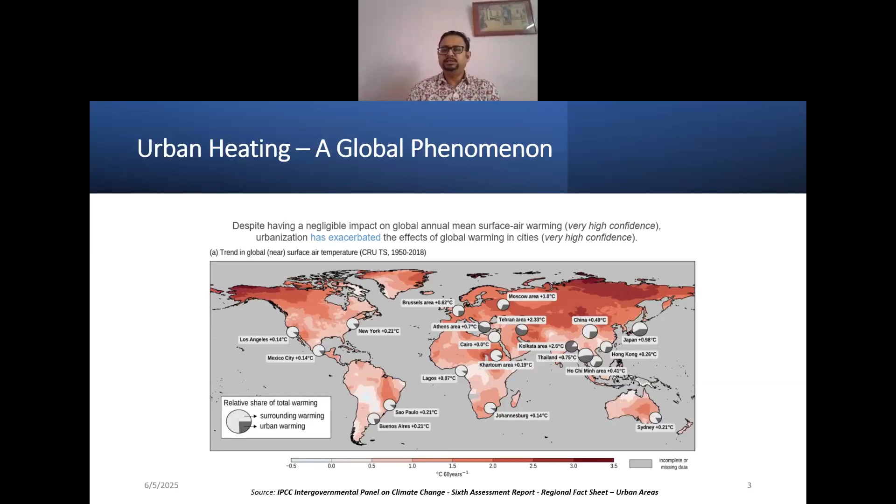So in order to do that, the moment the problem was identified, or the problem city or the case study was identified to be Kolkata, the next level was to look into the factors which actually contribute to the heating. It has been found from different studies that the root cause for warming of any city is its geometry, and that's on a macro scale.

The more we go into micro level, into the building level scale, we find that the heat retaining properties or the thermal performance of the buildings and the road are one of the major contributors to the problem of urban heating. The materials that make up these cities are very good at absorbing and retaining heat during daytime and then re-emitting them during nighttime, contributing to overall day-by-day warming of the city itself.

And then comes the urban heat island effect, which is further amplified if the city lacks vegetation and water bodies. We all know that Indian cities, in most cases, are losing on these two attributes. Urban water bodies - even in our school or college days, 2-3 decades back, in the city of Kolkata or in any urban city in the eastern region, we used to find so many ponds, neighborhood level or regional level ponds, which are no longer existing.

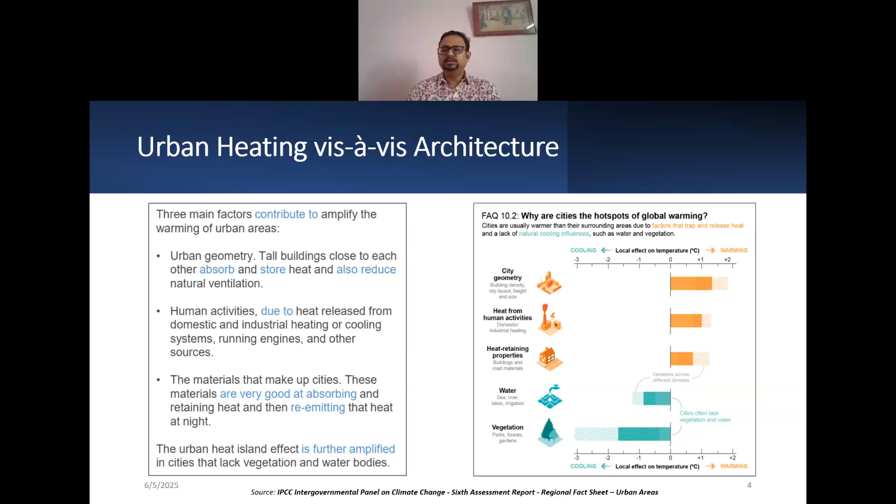Incessant cutting of trees, another problem. We have to develop, so we have to sacrifice something. Trees - easiest prey.

So the three levels of architecture and urban heating, the three facets: urban geometry contributing to it, with the form of building, proximity of built masses - these are the two things which actually come up from the urban texture or urban geometry of any city that we find. The second level...

human activities, where most of the perception of comfort comes up. In the same environment, within the same building, different people behave or react differently to the problem of heating, depending on their perception of comfort, which is again affected by many physiological attributes as well as activity patterns of the particular person. And then the artificial intervention comes up to solve that particular problem - air conditioners, air coolers, different types of mechanical control systems, they come up to compensate the heating.

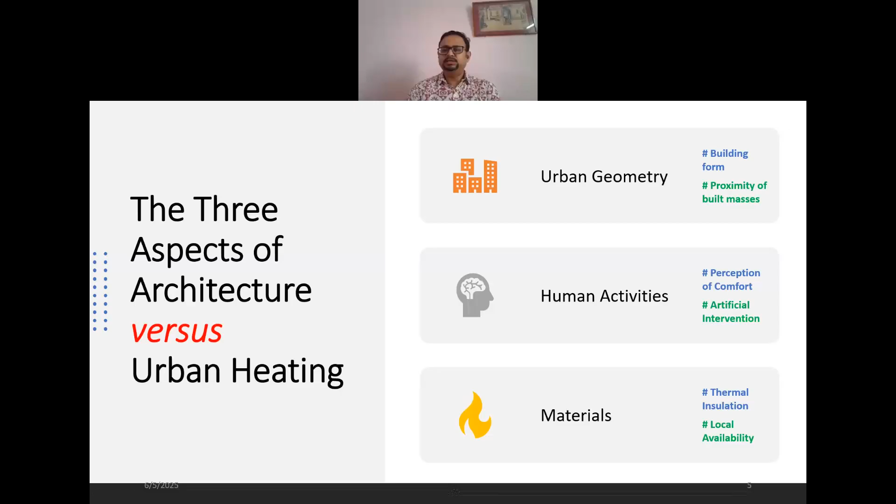And then lastly, the material level, which is the minuscule level in designing and construction of any building - the thermal insulation of that, local availability of that, all those. These are basically some of the thrust concerns that we have. And if we now get into...

the mitigation of UHI - what is required in order to mitigate urban heat island in any city - we can divide it into two different scales. One is urban scale, which is beyond the purview of this particular research and presentation, and the one which comes within the scope of this presentation is building level, which has approaches like shading and solar control, green roof, green wall, and courtyard centric planning. So these are the main thrust areas that we have.

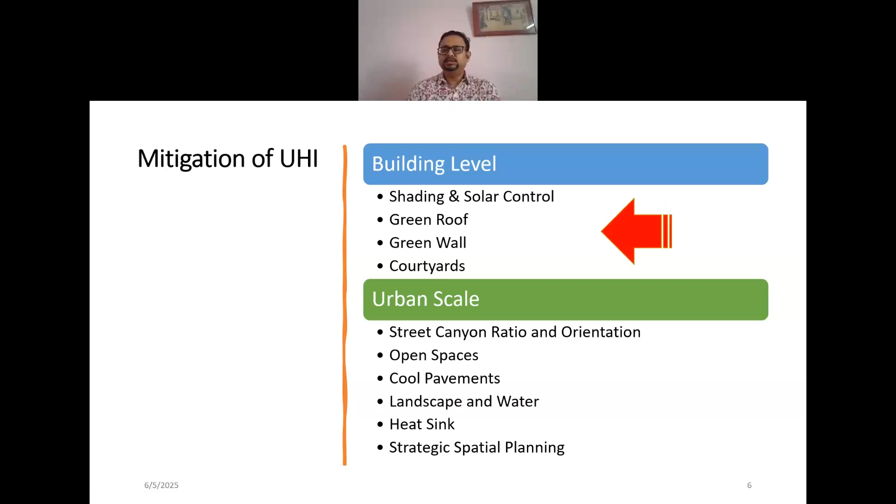So with this small background, the research that has been taken up and concluded has two major research objectives. The first objective is to find out whether old indigenous residential buildings of Kolkata actually show better thermal performance than the new residential buildings of the city. Is it the new buildings? Is it the new residences which is actually contributing to this urban heating?

As the IPCC map has shown, from 1950 to 2018, an increase of 2.6 degree centigrade average temperature has happened for this particular city. Now, what was responsible for that? Is it so that the residences, which constitute more than 50% of the total land use or the total built up mass of the city, are not so competent?

I'm putting this entire phrase in quotes - whether these new residences are not so competent in order to cope up with thermal comfort or thermal performance, which is required for the basic thermal need, or I'd say basic thermal condition, of a human being or of an occupant.

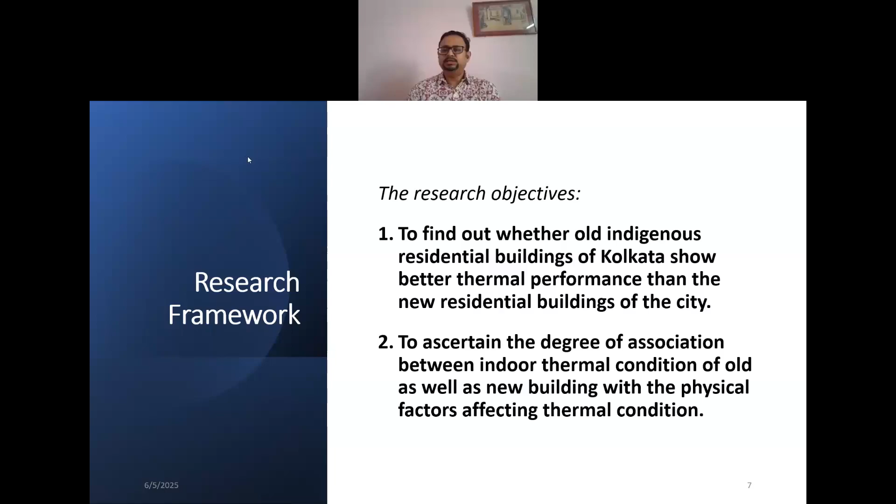And so that we can identify them and, if possible, reincorporate them in these new buildings, which will actually help the new design cope up.

Now, for conducting this research, there were three major steps. I'm coming to this slide a little early so that we can understand the sequence of the entire presentation more easily. There were three sets of data collected in the whole process of the research.

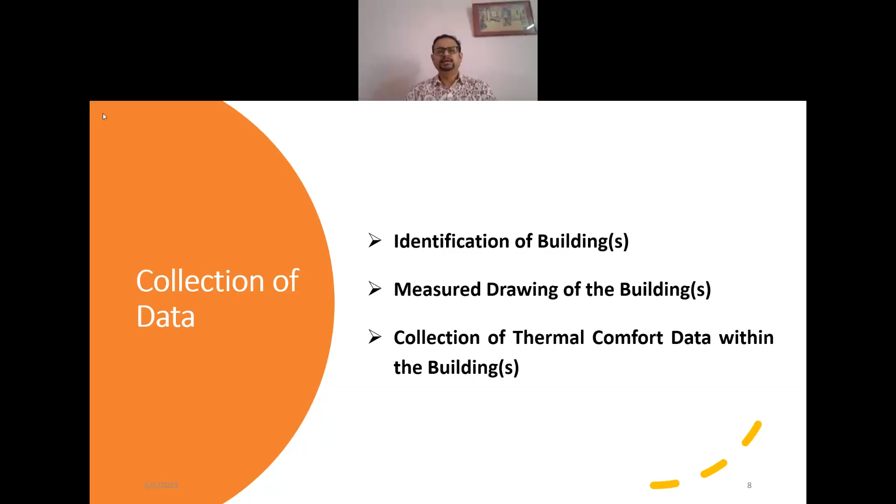First of all, identifying those buildings. Second, preparing measured drawings of the buildings so that the building geometry becomes very clear to the researchers. And the third is collection of thermal comfort data within the building. It was a very simple methodology adopted.

Coming to the next thing, what were the different component processes involved in the whole research? The very first component process involved was, first of all, identification of the responsible factors, their parameters and their indicators. Second, getting the thermal comfort perception or thermal performance, which we will find later on. And the third is the comparison of the old versus the new building.

Now, in this, there were two components which were predominantly quantitative processes: the factors responsible, the listing of factors, parameters and indicators, and the comparison, which was again a quantitative comparison undertaken as part of the research. At the same time, the thermal comfort perception was a qualitative process.

Here, although we have our main data analysis by the end of the presentation, I would like to highlight one issue: when we took up the research, the common thermal comfort researches undertaken all around India and the world take a qualitative approach, where the researcher conducts a feedback survey from the occupants, and the thermal perception of the occupant is taken into consideration in the research itself. The initial stage of this research also aimed at the same thing.

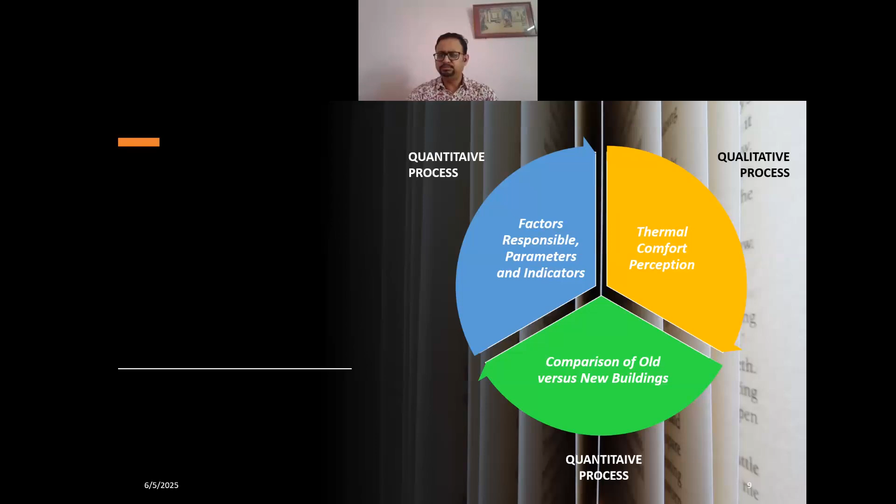From this point onwards, except for a few places, in most cases we have not used the word thermal comfort, but we have used the word thermal performance of the building, which we have defined for the purpose of this research to be a non-human based indicator.

Coming to the three major components, the methodologies used previous to this research in other studies: factorial analysis of parameters and indicators, measurement of indoor climatic condition, measurement of outdoor climatic condition, identification of factors influencing climatic condition, and correlating the factors with the climatic condition.

Then the thermal comfort perception, as I've already discussed, was there in the study but was actually taken out. And then comparison of old versus new building on thermal performances.

There can be so many methods. Simple visual, tabular or graphical comparison can be done, but they are obviously non-reliable. So a more analytical comparison through testing hypothesis or other analytical methodologies has been used.

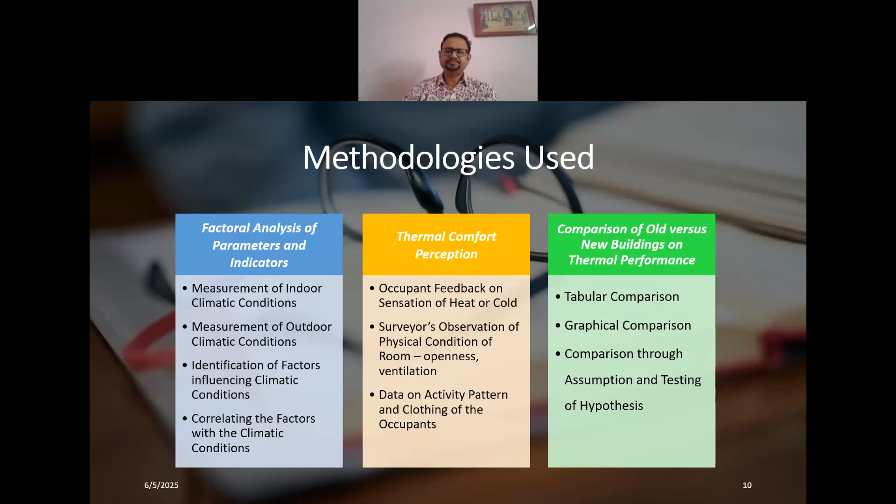Coming to the particular case study, the city Kolkata and its architecture. Here we will briefly discuss three aspects: introduction to the city, the major urban texture and urban fabric observed in the city, and typologies of residential buildings of Kolkata.

This brief discussion is required before we go to the specific case studies or case buildings that we have studied as part of the whole research.

Now, the city, which was erstwhile called Calcutta, is a city where major urbanization and building activities started with the inception of British occupancy of India. Although at present there is no unanimous decision on the date or year of establishment of the city, because there were already settlements in the area where the city started growing, historians do not endorse that particular specific year. But here we are concerning that the major urbanization and building activity started with the British occupancy.

And the pre-independence architecture of Kolkata could be grossly divided into two parts. First are the buildings belonging to the European quarter of the city, obviously the Britishers and some other Europeans as well - there were Greeks, Dutch and Armenians who came and settled in the city. Then there were buildings belonging to the non-European or Indian quarter, which the Britishers used to call the native quarter of the city. So I've kept that particular word at least in this slide.

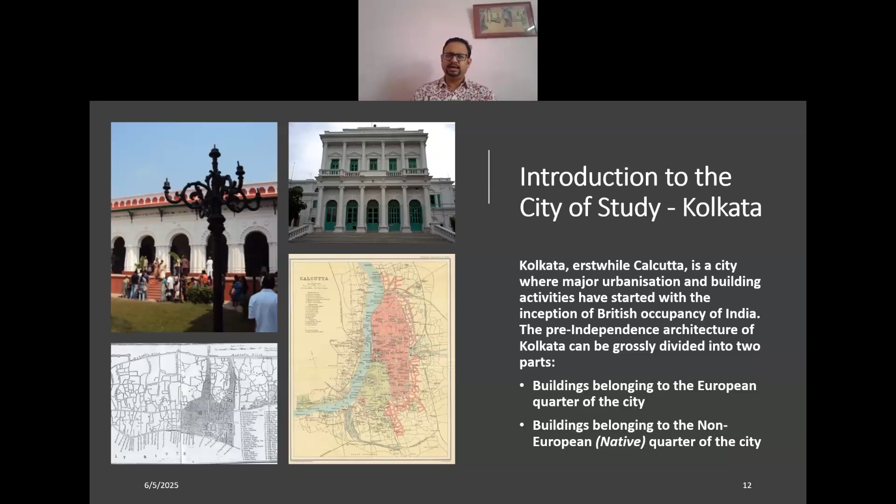So the city started growing somewhere around the 1690s. These are four maps which I could get from the paper written by Mr. Nair in 1990, in a book - a compendium on the history of Calcutta, edited by Professor Banerjee. In the year 1690, we can see three small hamlets: Sutanuti, Kalikata - which later becomes Calcutta and now Kolkata - and Govindpur. These were the three hamlets on the bank of the river Hooghly.

Within about 60 years, the whole city has taken its seat. By 1785, we have got a clear structure of the city. If you notice this third map, dated 1785, you will notice there is a Maratha ditch encircling the entire city, protecting it from the raids of the Maratha riders, cavalry called Bargis.

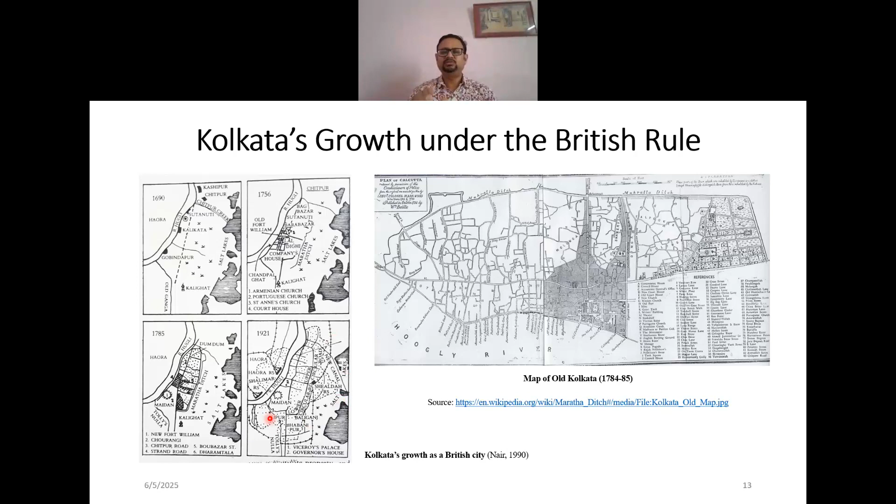That's the updated version of the city. The city has grown multifold beyond this particular place, and this is now considered the heart of Kolkata, or the main Kolkata city itself. This graph shows how urbanization kept growing, and we can see from the map right from the inception in 1690 to around the year 2000 how the whole city has grown.

The new satellite cities of Salt Lake and Rajarhat have come up in the city. The predominant growth thrust of the city is now towards the southeast as well as southwest, and that's the direction in which the city is growing right now.

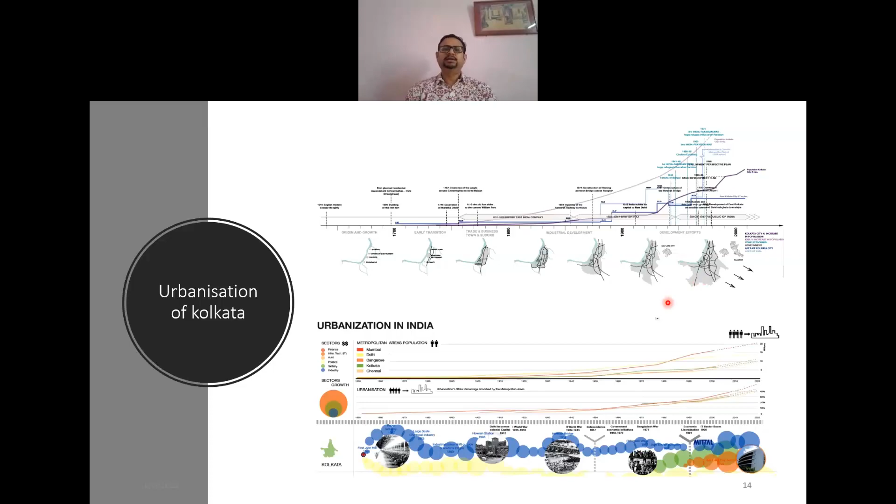Coming to the urban fabrics of Kolkata: this part of the city, we are not going into the larger extent of Kolkata, which is delineated for administrative purposes as the Kolkata Metropolitan Area or KMA, governed by the Kolkata Metropolitan Development Authority or KMDA. We are more interested in that nutshell of the city.

We are highlighting this as the old Kolkata, and then the new Kolkata, the new residences we were talking about, which are new buildings designed within this old Kolkata area itself. That's primarily our area of study, the zone of our study in this whole process.

Coming to the urban fabrics, the very first urban fabric we should look into is the European quarters, because it was the Europeans who ultimately started the urbanization in this particular city. I've tried to take up very small areas with figure ground maps and satellite images to show how the different buildings of these different quarters or fabrics of Kolkata started growing up.

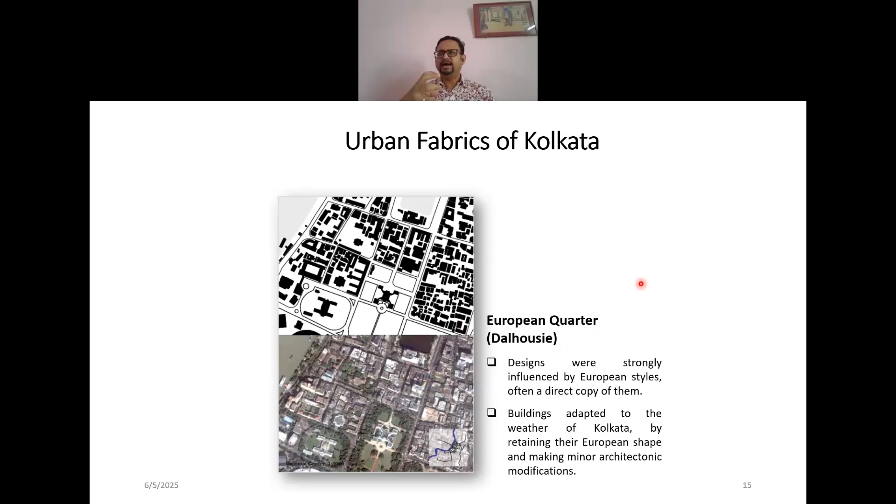The next one is the indigenous quarter. At the same point of time the European quarter was being built up by European architects, constructed or supervised by them and built by local masons, wealthy Indians were constructing parts of the city like Chitpur, Pathuria Ghata, and Jorasanko. These are the areas where these wealthy Indians constructed their houses.

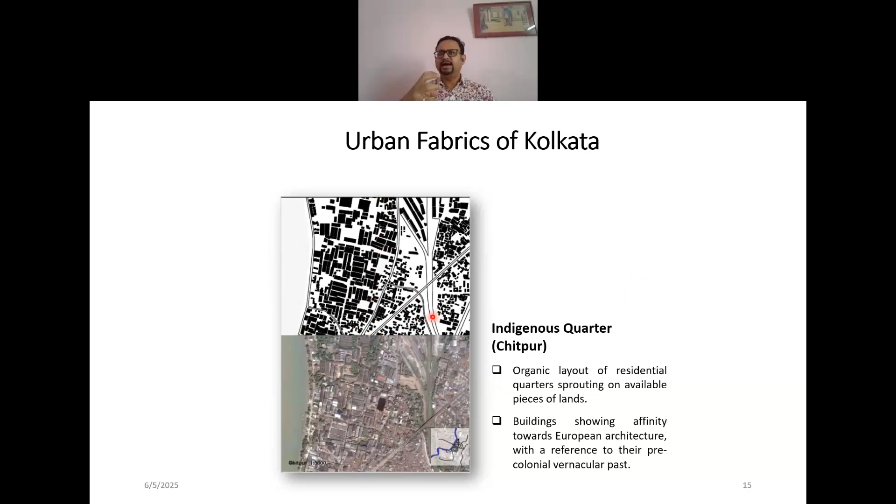In the Chitpur area, although there have been attempts at creating regulated growth, the growth there is still sporadic.

Then comes the part of those few places which have seen post-independence expansion. Immediately after independence, around the 60s and 70s, certain peripheral or peri-urban areas were included in the main KMC, the Kolkata Corporation area, one of them being this area called Lake Gardens.

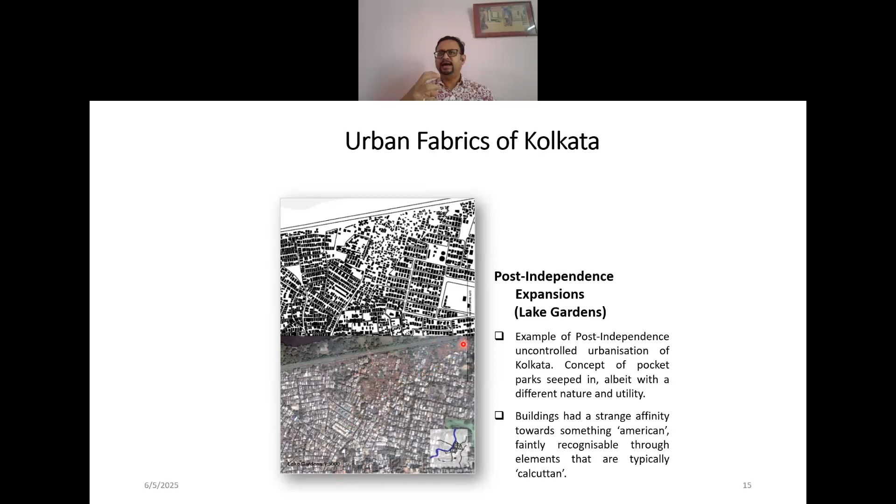These areas show that there are parts which are planned on the right side as well as the left side of the image, and then there is huge growth of slums and squatters taking place. In the satellite image you can clearly see this whole area is a slum and squatter, an unplanned part. So it's a peculiar blending of planned and unplanned cities growing up hand in hand.

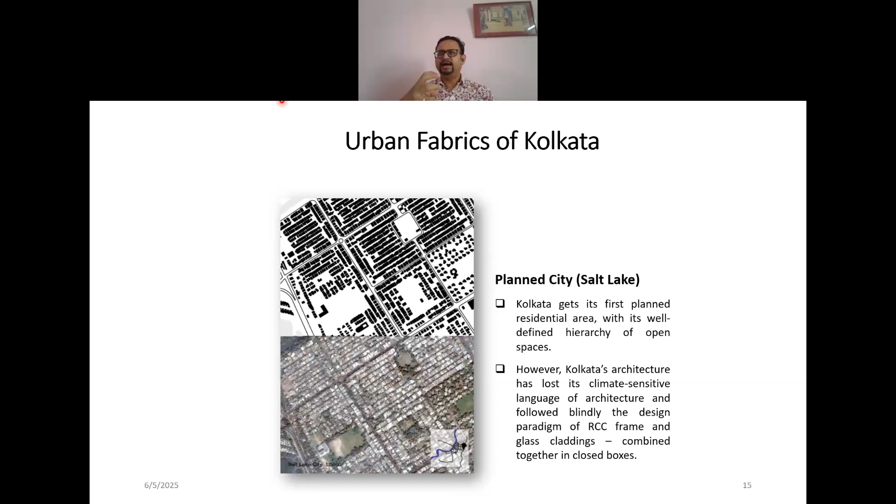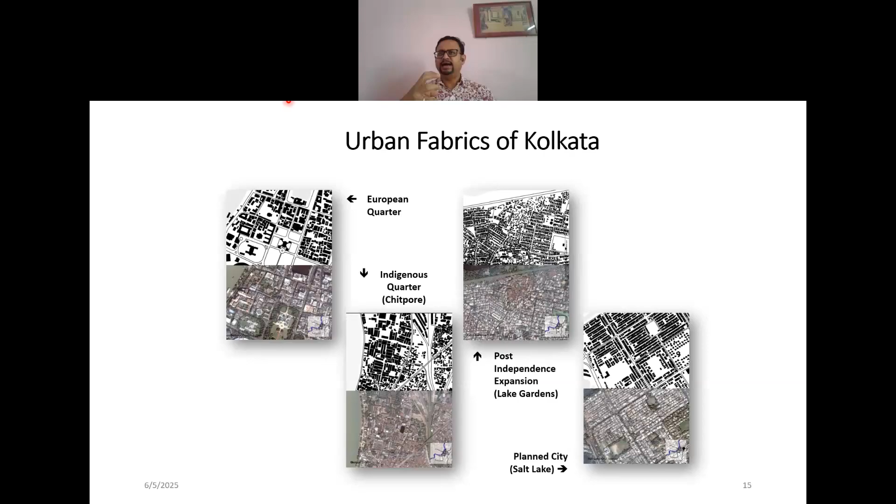The urbanization ultimately finalized in the 1980s. These are the four different unique urban fabrics which we can observe in Kolkata. More or less a combination or pure form of these fabrics can be seen in the city itself.

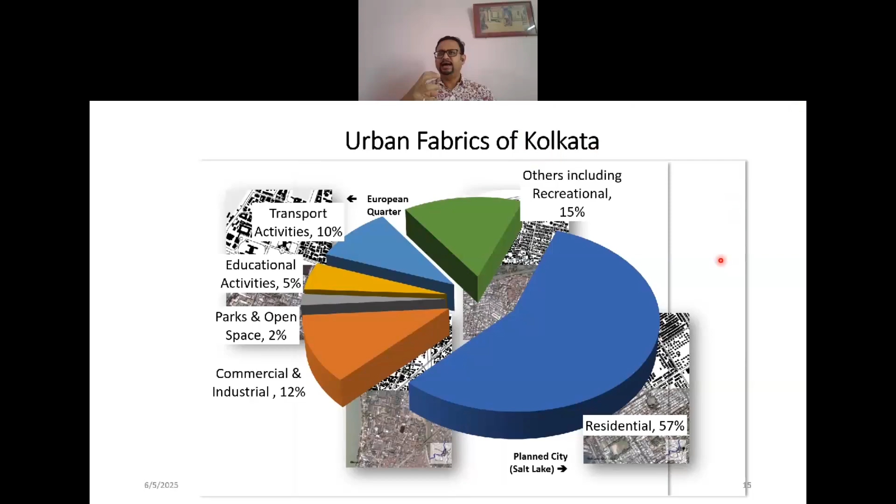When we consider all of these, we find that the land use plan shows that a total of the built up area, residential area occupies 57% of it, which contributes to the majority of the urban heating of that particular city, hence the importance of intervention with the residential areas.

Now, how does the building look like for these four textures or urban fabrics? For example, we have seen the Governor House in the European quarter, and this is how the Governor House looks. It doesn't have any or much intervention matching with the local climate of the city.

This house was inspired by the Kedleston Hall in England. What the architect has done is simply copy pasted the plan from that British setting into Kolkata, whereas the climate and everything is absolutely different. They didn't consider it much; they simply copy pasted the whole design.

And then later interventions like these awnings, chhajja, and all these things were added up, which were not there in the original building, has been added up with this copy.

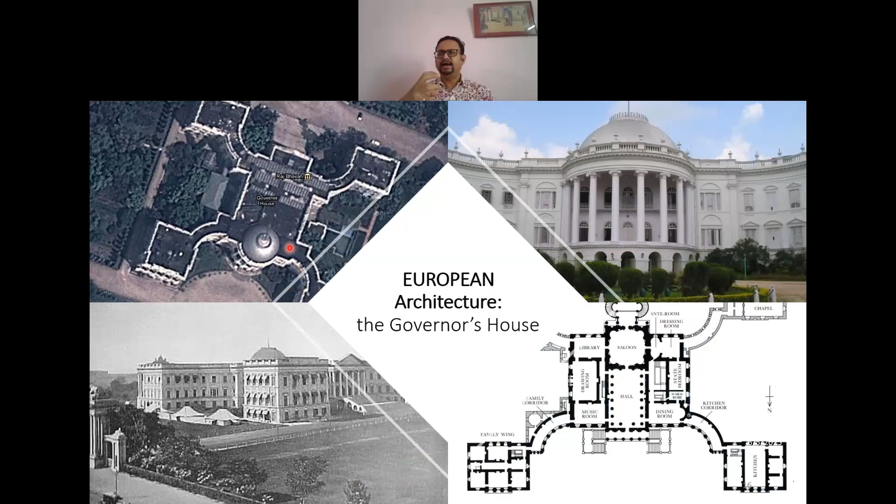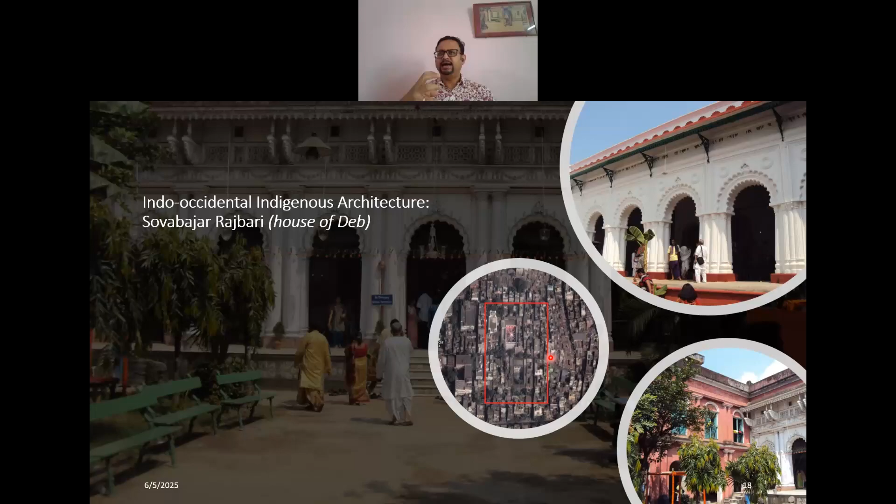So now, while we have looked into the two distinct typologies, our research did not consider the European prototypes, because the European prototypes, as we have found, did not necessarily correspond to or care about the Indian climate. Hence, our entire research took care of the old indigenous houses which belong to Indian owners and were designed and constructed by Indian owners themselves mostly, or Indian engineers or architects mostly.

So to actually identify these areas, the whole of this inner city, on the western side is the river Hooghly. On the eastern side, this was, if you remember, the Maratha ditch, which later got converted into the circular road. So what we have done is taken up this older part of the city as northern Kolkata, as it is still being called North Calcutta.

The central part of the European part has been delineated again in this area, which is the European quarter. In our study, we have not considered anything from this European quarter as such. And then comes this southern part of Kolkata, which mostly developed somewhere around the late 19th century and early 20th century.

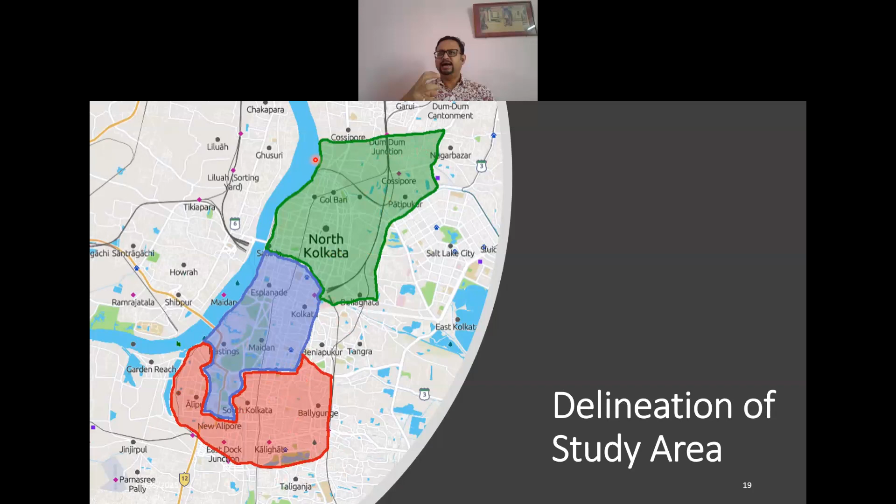There is a time gap of almost 100 to 150 years, on average, between the North Kolkata homes and the South Kolkata homes. So most of our sample areas were from the North Kolkata region.

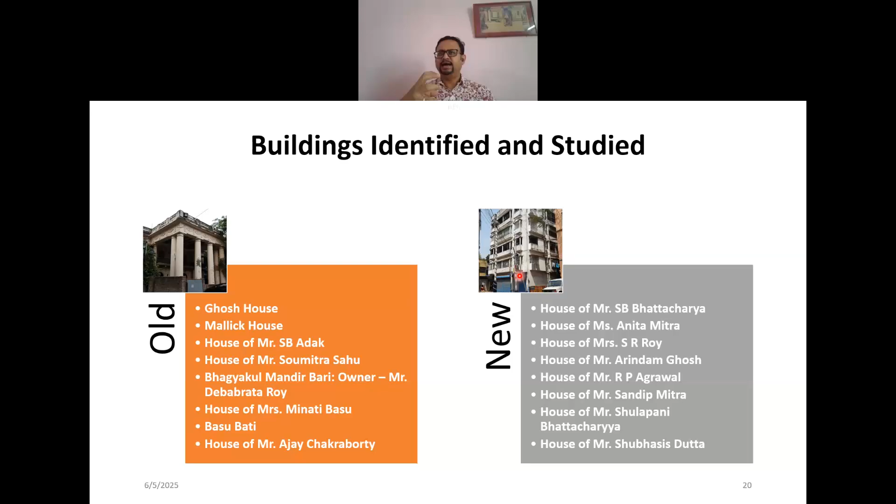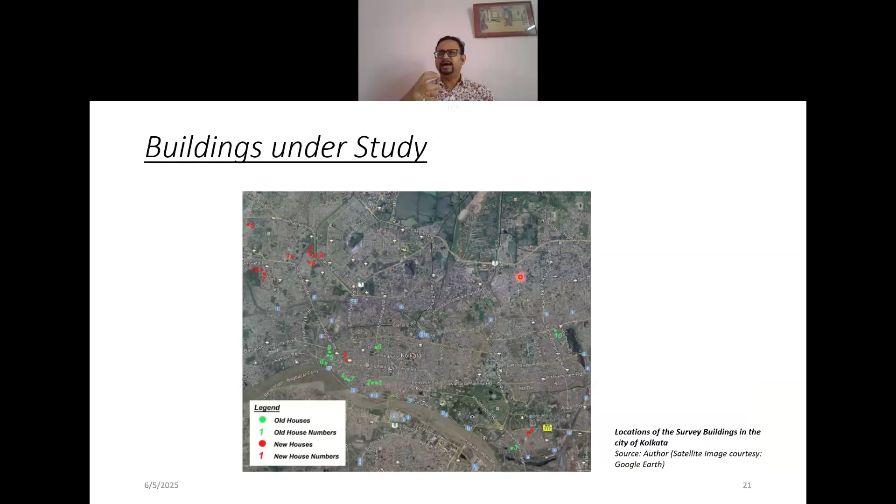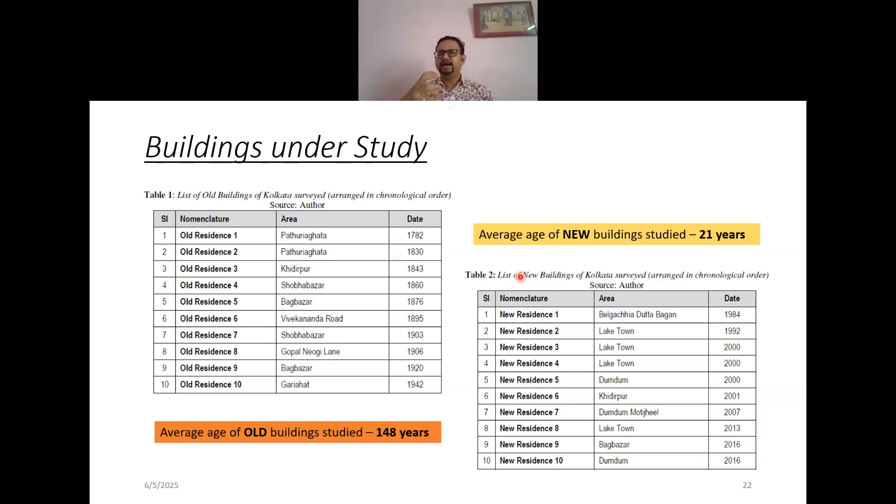So there is a comprehensive difference between these two sets of buildings. Coming to the study of the old residential buildings, these are some of the sample buildings. This one is the oldest, constructed in 1782, having multiple courtyards.

When outsiders come in, since the puja is conducted with the participation of the women themselves, in these old houses many times high-ranking Europeans used to be invited. When those Europeans came to pay their respects, the women of the house would go up into this particular balcony to experience the whole activity going on.

And then there is an inner courtyard again. So it's a three-tier system of courtyards in this particular house. It's more of a linear layout.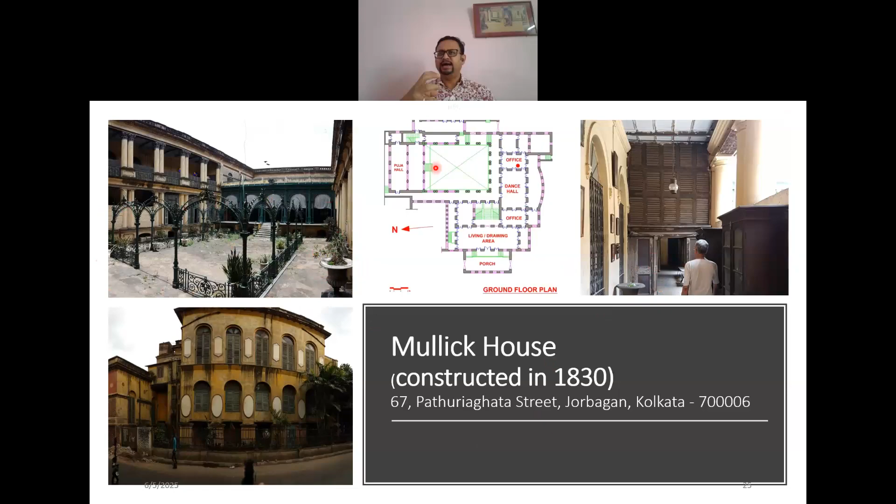This whole courtyard is surrounded by colonnaded verandas. The right hand photograph shows one of these verandas, giving an idea of how the whole thing looks, and so on.

We also took up small case study buildings which don't have courtyards but have tried to create a courtyard experience from within the house by detaching built units from other built units. For example, in this sample the house was so small that not all floors could have a courtyard, but on the topmost floor of this three-story house, they created some courtyard experience by detaching the kitchen and toilet blocks from the living quarters, introducing small open areas.

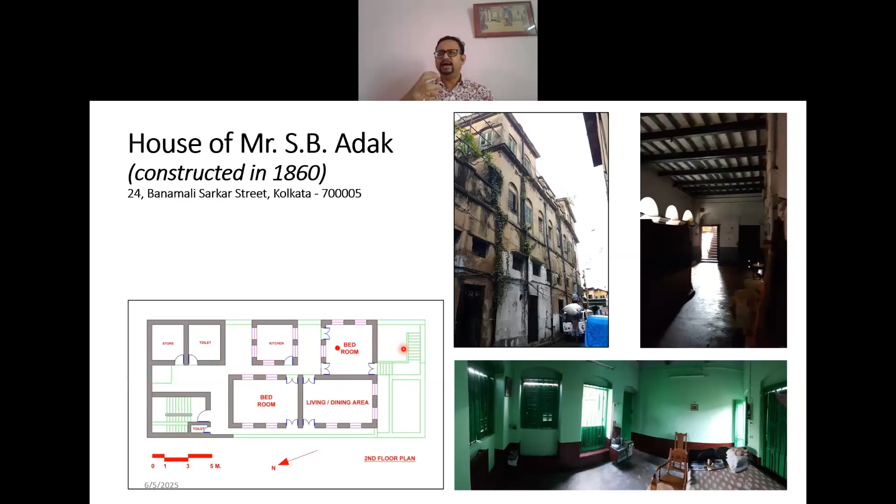Whereas there is a rear courtyard which runs from the ground to the topmost floor - this is the courtyard where my highlighter is. There are other examples where the courtyard appears in a very sliced manner.

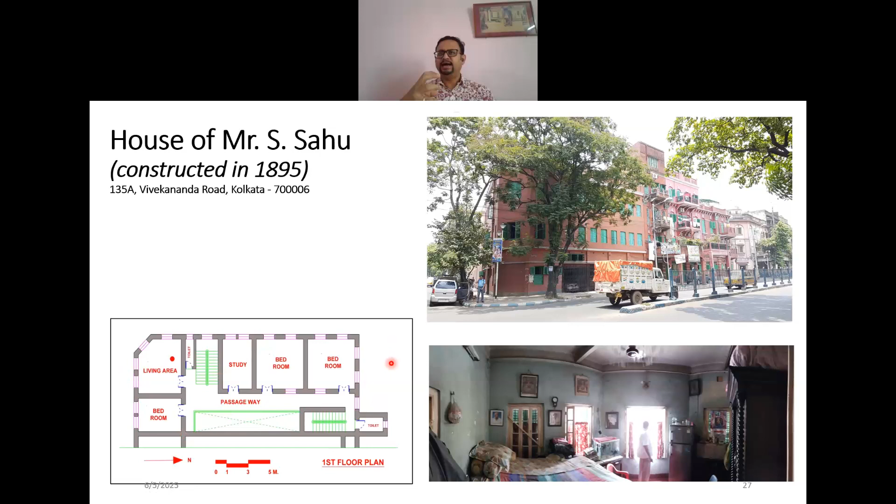The reason being this is a very long house with several owners over time; when the original owner was no longer there, the house was partitioned into small segments, giving slices like this. This is a slice of the entire house, which has been divided into 5 such small slices. If you join up all 5 slices, you get a huge courtyard similar in scale to our previous case study.

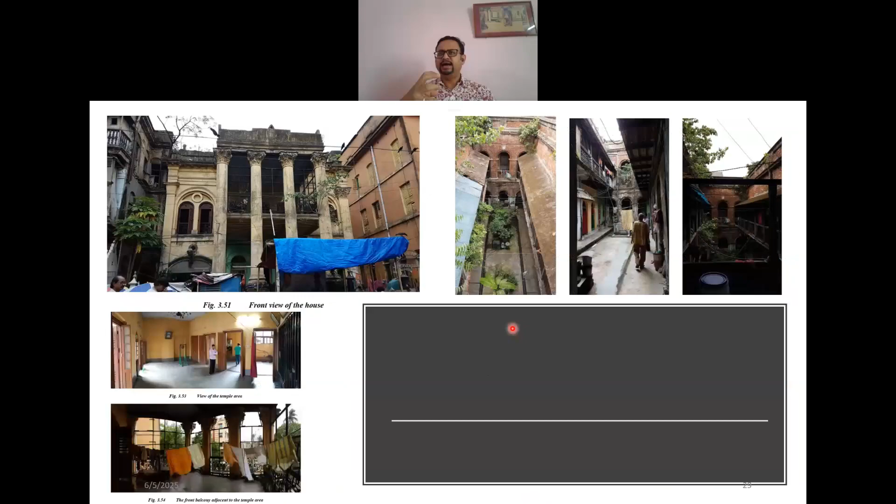Other examples include large scale buildings like this, again having multiple levels of courtyards and colonnades around them. This is another example of it.

Now, coming into the unique design components of old residential buildings. When we study these old residential buildings, there are certain unique components typical of these indigenous residential buildings of Kolkata. We've tried to enlist them. There are 7 such unique elements.

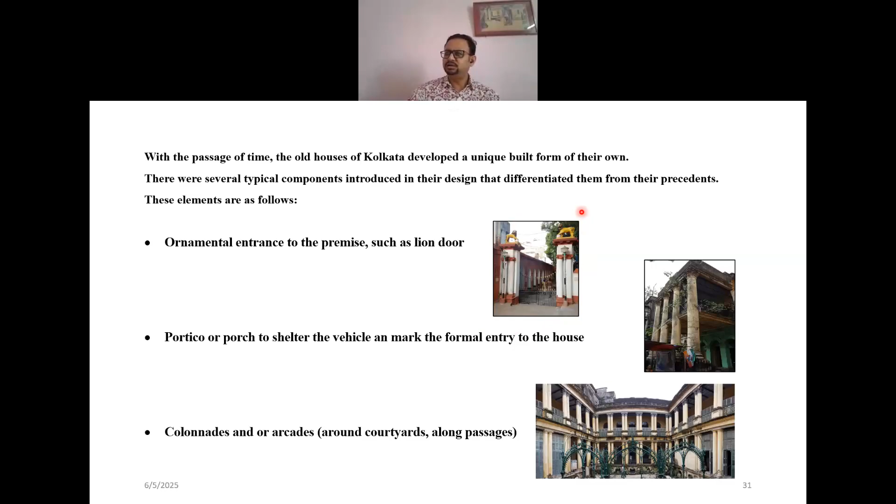The first one being an ornamental entrance to the premise, such as a lion door, Singh Darwaza as we sometimes call it. So this is that. This is from the Dev family, from Shobhabazar.

The second component will be portico or porch. We have to actually understand the beginning of these interventions in these indigenous houses, when there was a practice of not taking the cart or vehicle, the horse cart in this case, inside the house. So there used to be an entrance like this, but then they started copying the Europeans and started bringing the horse-drawn carriage to the front of the main entrance under a portico. So porticos started coming up like this.

Porticos or porches, the third part. After we enter inside the building, into the first courtyard, the public courtyard, we find these colonnades or arcades around the courtyards, along the passage.

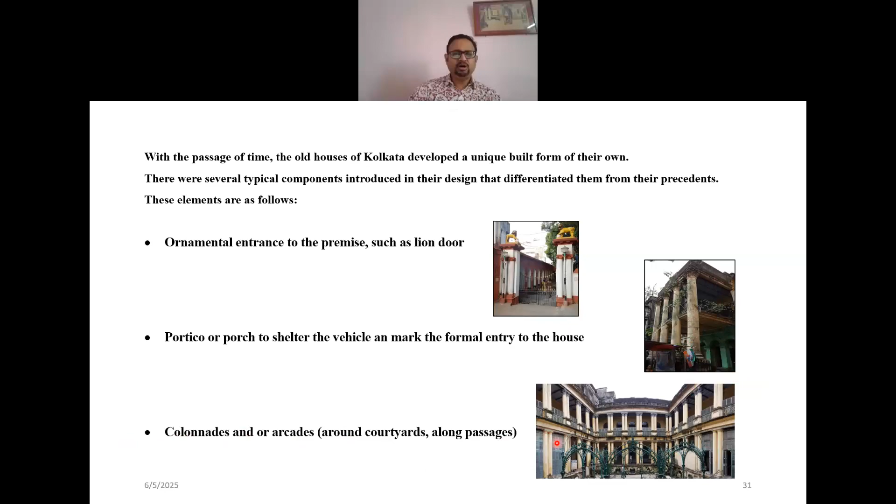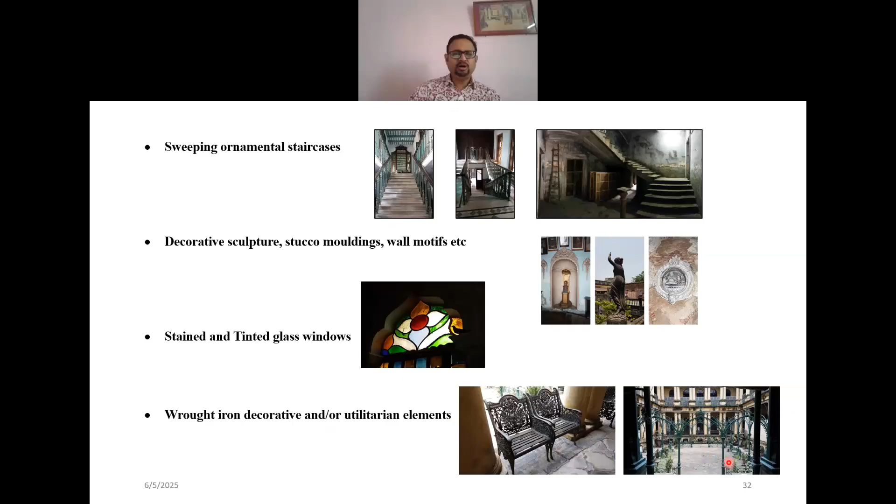And the last one being wrought iron, decorative and utilitarian elements. Both decorative, for example benches or such filigrees, frames, everything coming up in this particular part.

Going into building materials and construction, the materials typically used in these indigenous houses, not exhaustive but the majority, include bricks of different shapes and sizes, not only the standard 250, 125, 75 brick we see right now, but various tablet bricks, small bricks which were employed, and lime stucco, the lime plaster that they have used.

In certain cases, we have found lime plaster of a thickness of even 2 to 3 inches being used in these houses, which considerably helps the thermal cooling of the interior of the house. Cast iron members, mostly decorative members, bamboo and khaskhas were used to create screens from the direct sunlight to the balconies.

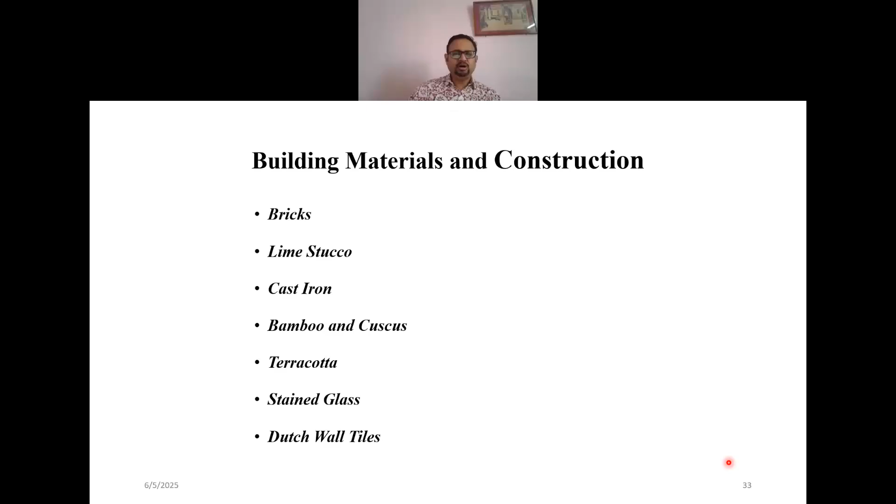Terracotta in terms of tiles, terracotta arch springing tiles, terracotta decorative tiles, stained glass, and Dutch wall tiles, which were mostly used for dado and skirting inside the building itself.

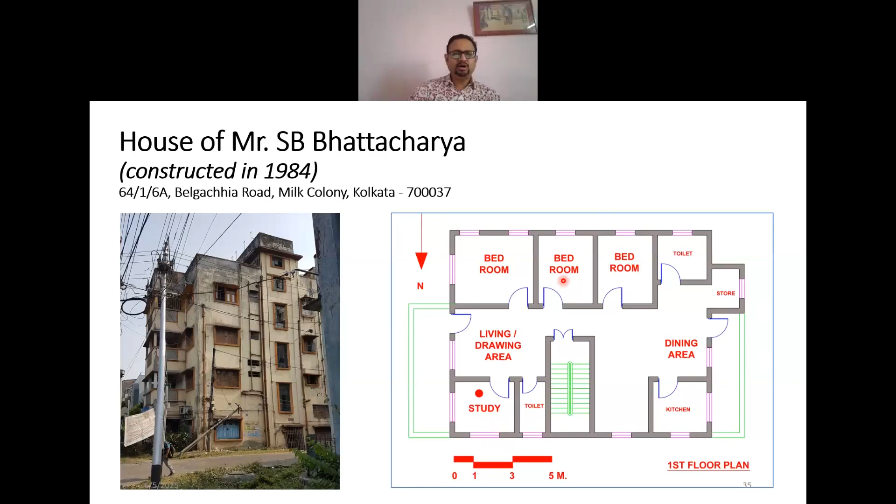Coming into the new residential samples, they are more compact. They lack those courtyards, they lack those colonnaded balconies or verandas. They are more a compact unit. In many cases, this actually results in a lack of cross ventilation, except for the corner rooms, which obviously can have the luxury of corner windows, ensuring cross ventilation. But most of the sandwiched inner rooms lack that cross ventilation.

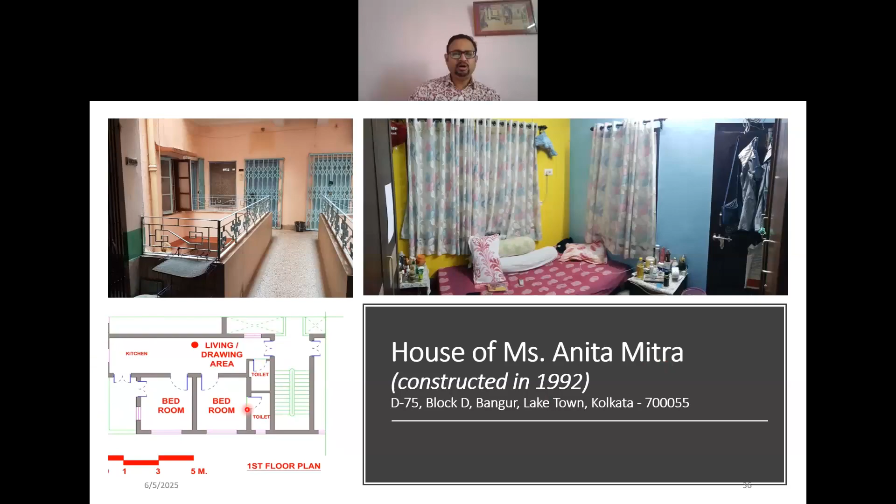And even smaller units don't even afford to have those climatological interventions. Some examples I'm quickly browsing through.

These are examples of apartments, as colloquially we call them flats. Some of the other examples.

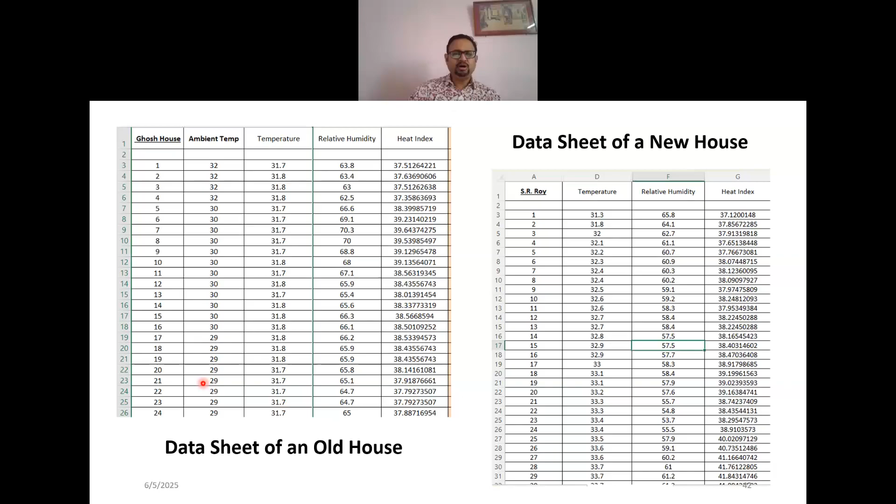Now, after we surveyed and studied those buildings, we installed temperature and humidity data loggers in these houses, which have recorded data on temperature and relative humidity both at an interval of 15 minutes. So from each house, you have around 300 continuous samples, which have then been analyzed, and new indices have come up. These particular representative tables show one particular index called heat index. We'll come to that in a later slide, so please remember, I'll refer to that. This heat index is a composite index that has been used in this particular research.

Coming to research objective one: the objective was to find out whether old buildings were more comfortable than new buildings. So for that, we needed to compare them. In this particular comparison, as I told you, we considered thermal comfort indices, which don't take into consideration user feedback in thermal comfort. They simply take up non-human thermal comfort parameters, converting them into those indicators.

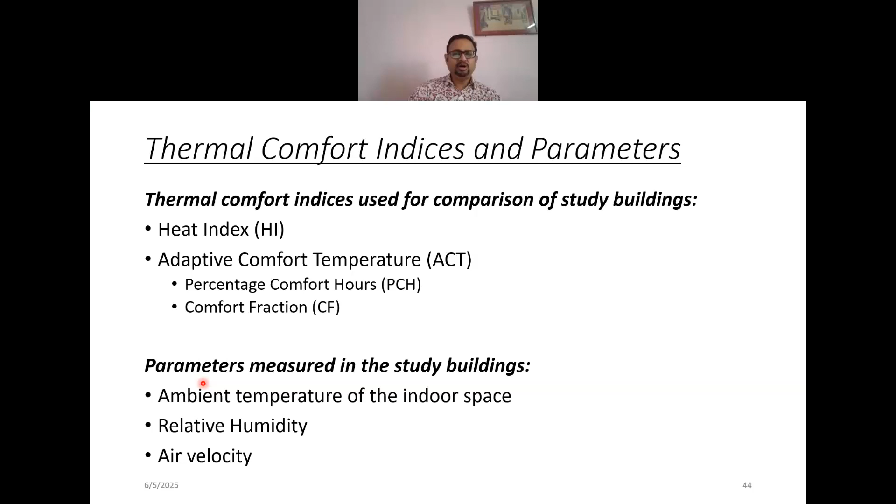One is heat index, as we have already seen in these tables, those heat index columns, and adaptive comfort temperature, or ACT, under which we have two further sub-indexes called PCH, percentage comfort hours, and CF, comfort fraction. To get these indexes, HI, ACT, PCH, and CF, we required three raw data sets.

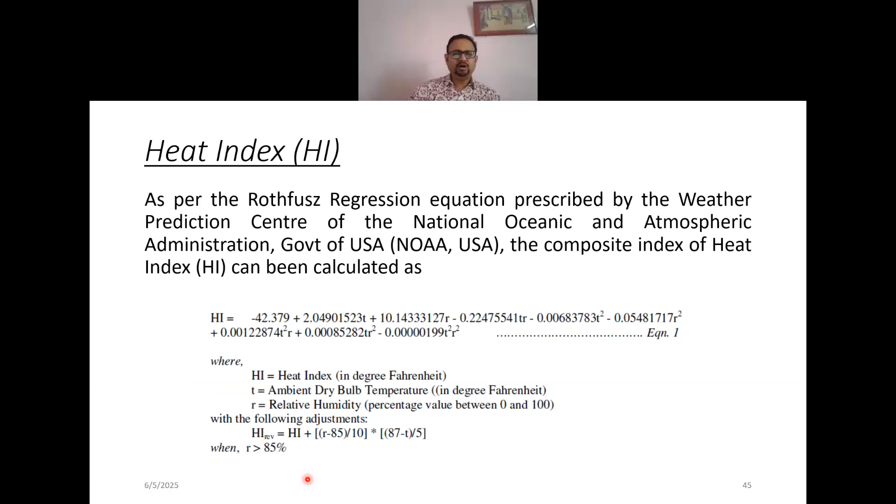which we have collected in those buildings itself: ambient temperature, relative humidity, and air velocity. When we feed those data, the heat index inside each building could be calculated using this particular formula, with a few minor adjustments, as this part of the equation shows. Because in most cases in Kolkata, whether it's an old building or a new building, the relative humidity almost always crosses 85%. It's a very common phenomenon, so in cases where it crosses 85%, we had to do that adjustment.

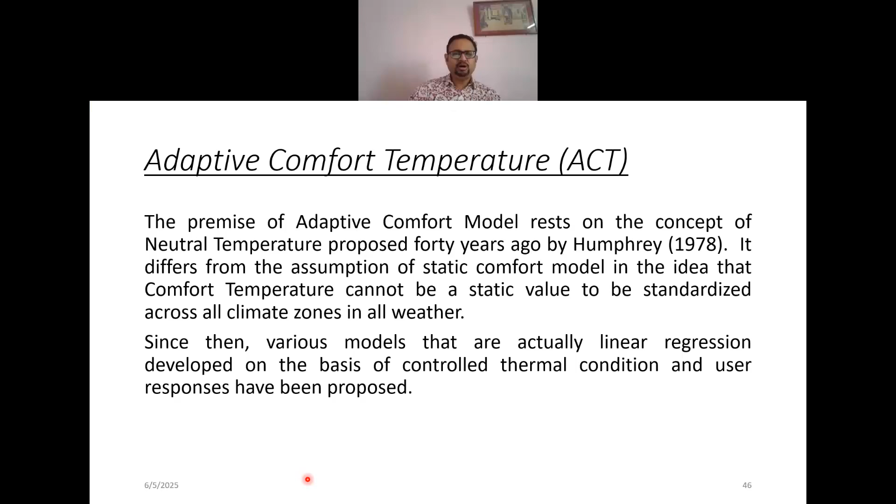Coming to the second part, ACT, the premise of ACT, as all of you know, goes back to the work of Humphreys, which he conducted in 1978. Since then, various ACT models have come up as proposed by experts in this field. So we tried to list them, the various ACT models which have been worked upon: the initial one proposed by Humphreys, then Auliciems' proposed one in '81, Griffiths, Nicol and Rauf, and Szokolay. These are all different adaptive comfort temperature models, which give the neutral temperature based on the average outdoor temperature.

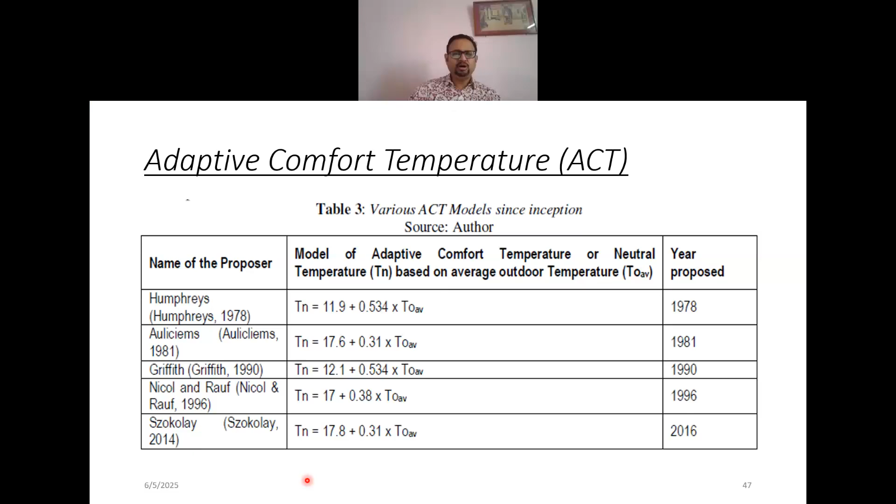Now, most of these ACT models were developed outside India. As a case study, or case data, on which they were based, almost all of them were non-Indian, from other countries. So in India, to compensate for this, researchers like Sanyogita Manu and team developed one Indian model for adaptive thermal comfort called IMAC in 2014, in which the equation is: neutral temperature, or TN, is equal to this.

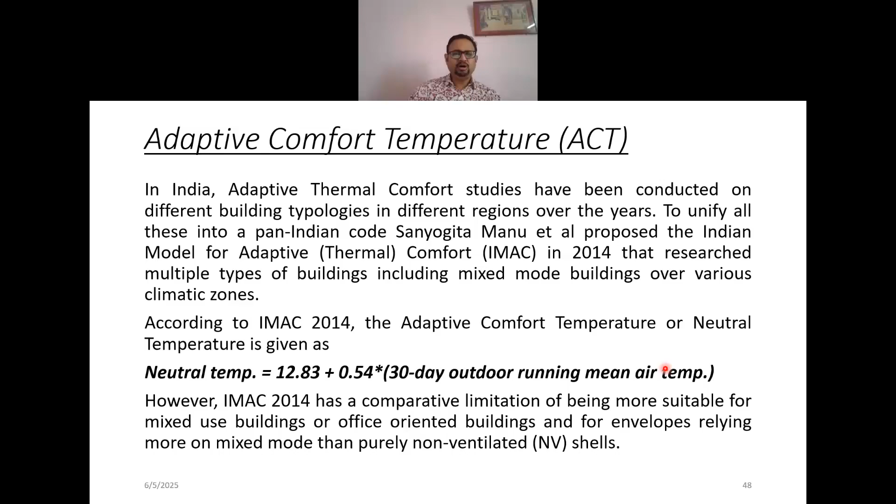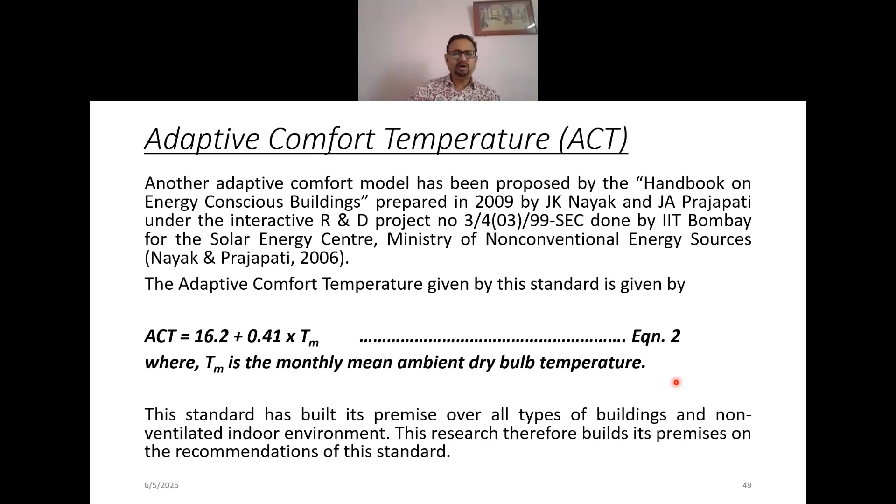We further explored, and finally came up with the ACT proposal proposed by two researchers, Nayak and Prajapati, in a handbook on energy conscious building, a work done on behalf of IIT Bombay for the Solar Energy Centre, Ministry of Non-Conventional Energy Sources, in which they have given this particular ACT. This model does not consider any manual feedback on adaptive or thermal comfort. It's a complete non-manual one. Hence, this model was the most suitable one.

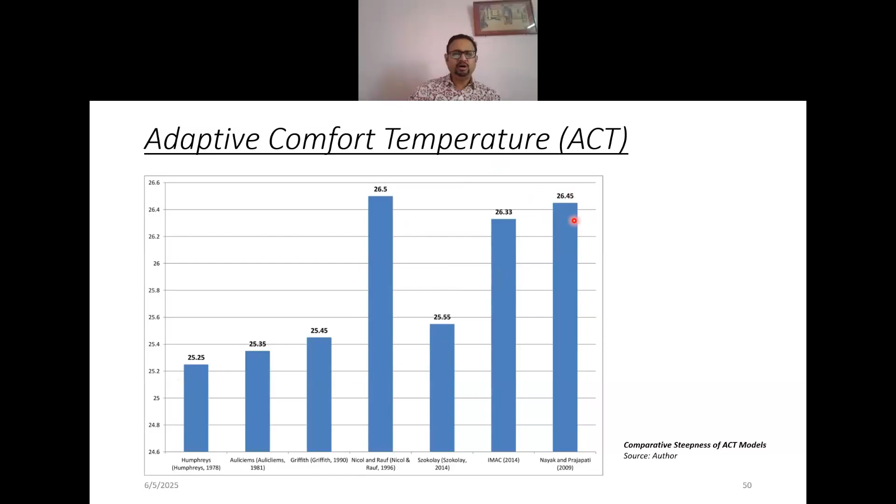When we compared them with one base value of TO as 25 degrees centigrade, what we found is that the different ACT models predict values at different levels, in which the Nayak and Prajapati model is one of the highest, actually the second highest—but since we are not considering models up to Szokolay, which were all developed outside India, out of the two Indian models this gives quite a positive steepness of ACT, a higher side estimate of the adaptive comfort temperature. If we can satisfy that value, we can satisfy even lesser values as well.

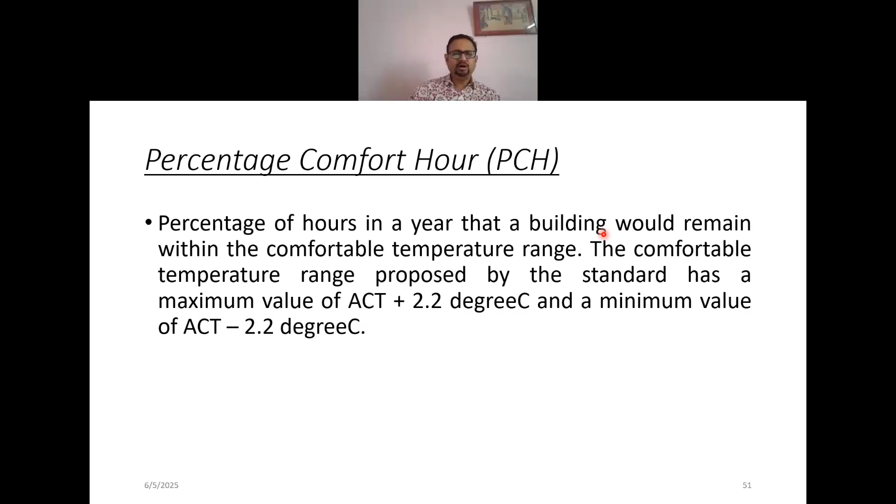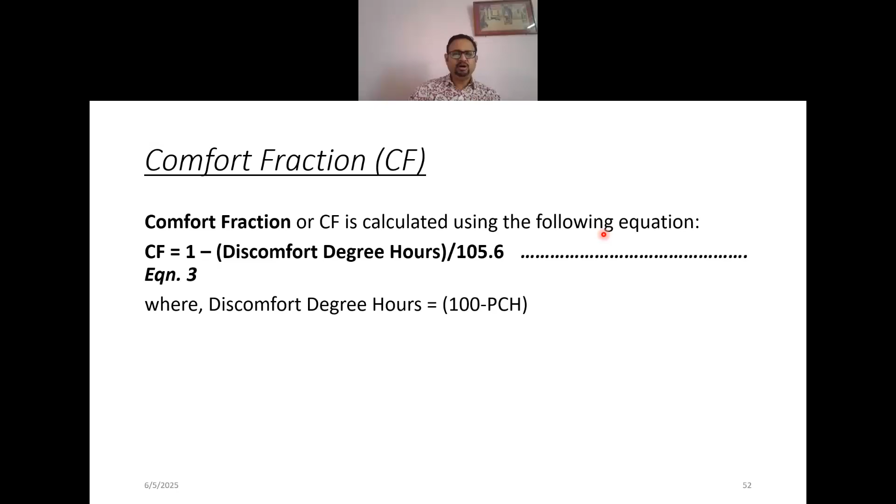Coming to PCH, the percentage comfort hour is given as the percentage of hours within a building which falls within the range of ACT plus 2.2 degrees and ACT minus 2.2 degrees. The hours for which the whole building falls within that range, divided by the total study hours, gives us the PCH. From PCH we get CF, or comfort fraction, as 1 minus the discomfort degree hours, which is given as 100 minus PCH. So whichever is within the comfort range, the rest is in the discomfort area—discomfort degree divided by 105.6 gives the comfort fraction. So these are the three types of indicators that we have got.

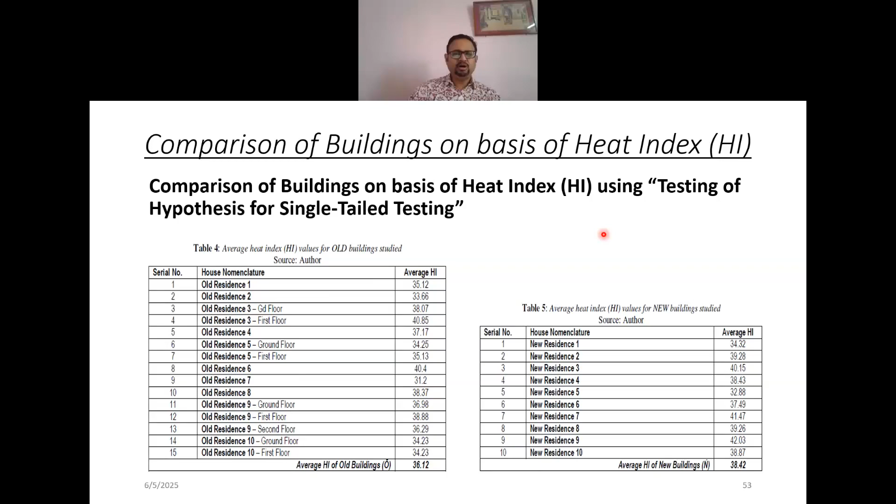Then we started comparing the two sets of data on the basis of these indicators. Initially for heat index, which is a composite value taking care of temperature, relative humidity, and air velocity—all three basic parameters—we got this HI value, along with a simple statement of the confidence level and how the testing was done. Ultimately, we found that the average heat index of old buildings is lesser than the average heat index of the new buildings.

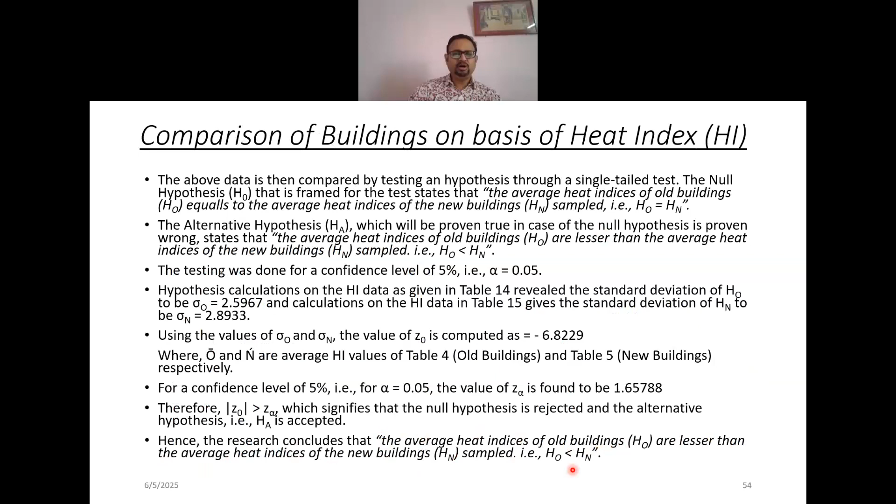That means, in simpler terms, the old buildings were found to be actually cooler than the new buildings over a sample of around 300 sets of data collected in each of these 20 buildings.

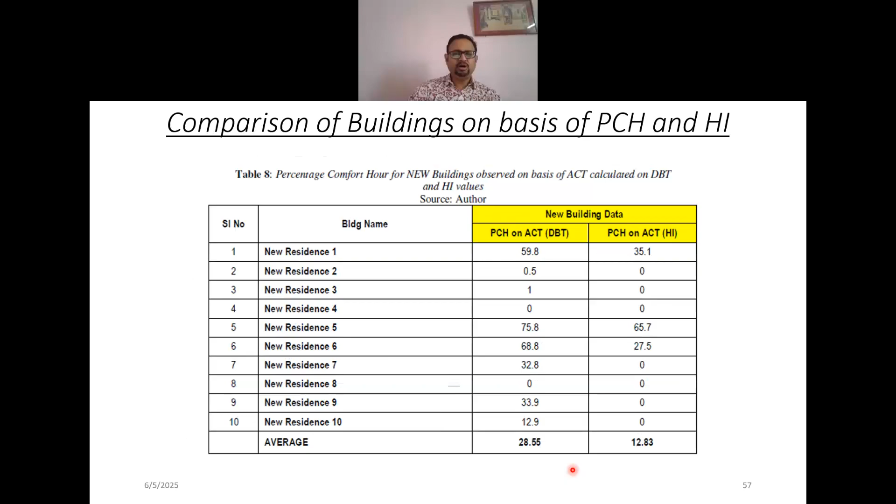Now, the same exercise was done on the basis of PCH and comfort fraction for old buildings versus new buildings, and again the hypothesis testing was done. In each case, we found that the hypothesis was proven true.

That means the percentage comfort hour for old buildings is more than percentage comfort hour in new buildings. The old buildings provide more time of comfort than the new buildings. Similarly, comfort fraction is more in old buildings than in new buildings. So that's how the whole thing was done.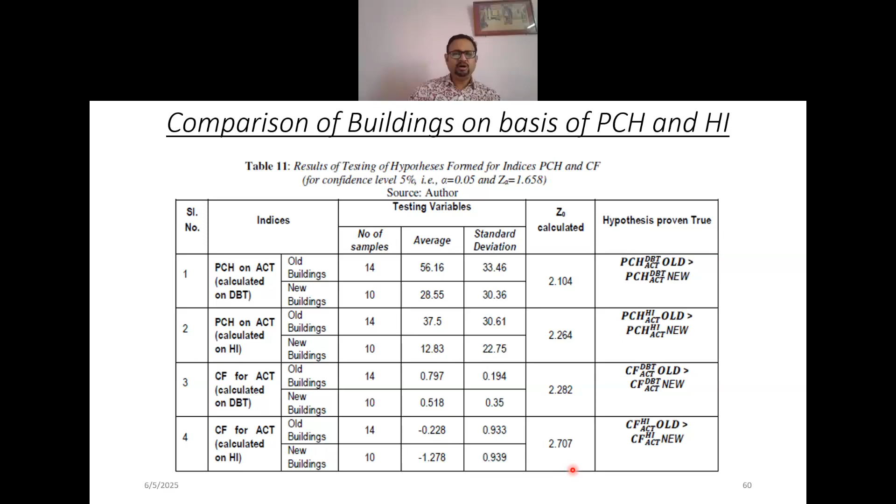In the conclusion for this first objective, we found that a total of 20 buildings were studied as part of this dissertation, with representation of old and new buildings. The thermal data was collected for continuous 48 hours in each building using a temperature data logger with an interval of 15 minutes.

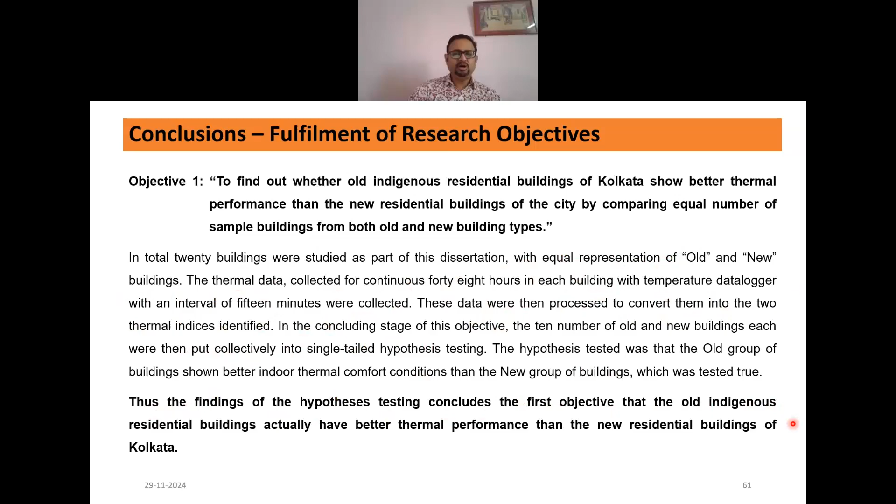These data were then processed to convert them into the two thermal indices. The findings of the hypothesis testing conclude the first objective: that the old residential buildings actually have better thermal performance than the new residential buildings of Kolkata.

After we ascertained that, we got into the second part: what were the building components which were important for this. For that, we identified five basic building components which contribute to thermal comfort of a building.

First, the orientation of a building. Second is building material and their thermal conductance. Third is surface area to volume ratio, that is S by V ratio. Fourth is shading of the building skin, which can happen individually, independently with the help of chhaja, portico, etc.

Or it can be mutual shadowing, that is, the shadow of adjacent buildings. The mutual shadowing can again be of two types: the building itself casting shadow on another part of the building, which happens mostly for courtyard-centric buildings, and then the shadow of an adjacent building or any large tree falling on the building surface itself.

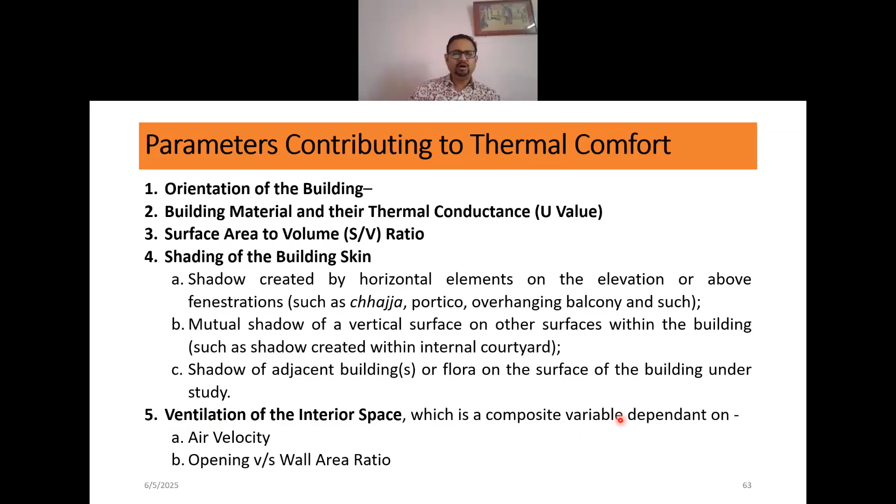And then the last component is ventilation of the interior space. So these were the five basic parameters, and we collected data for these five basic parameters.

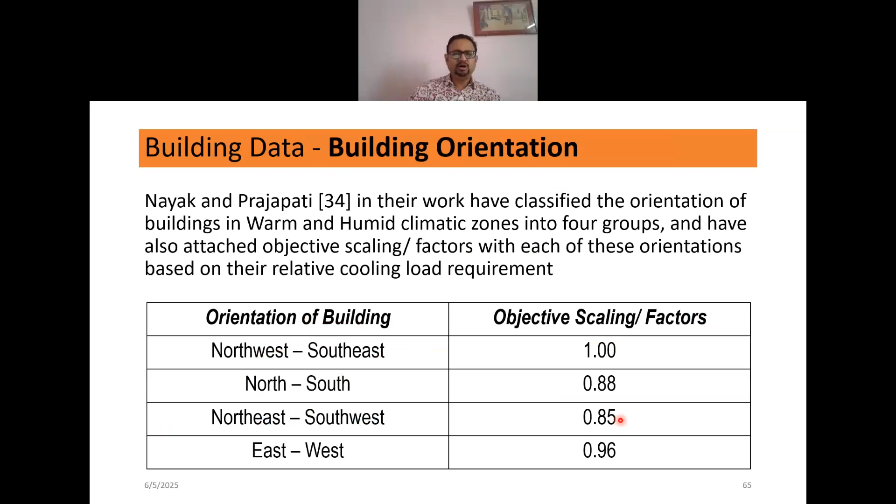The first one is building orientation. From the handbook, we got the orientation of the building and the scaling factor of each of these orientations, so we obtained those scale factors. These are the different buildings and their orientation factors.

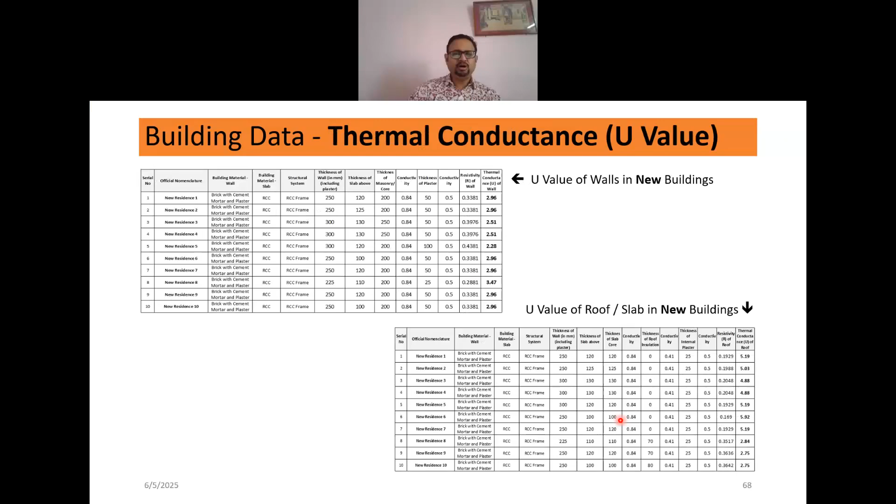Similarly, thermal conductance, the U value, was calculated for each building. We measured the thickness of the wall, thickness of slab, material, and everything, and calculated the U value for both old and new buildings — walls, roof and slab of old buildings, and similarly walls and roof slab of new buildings.

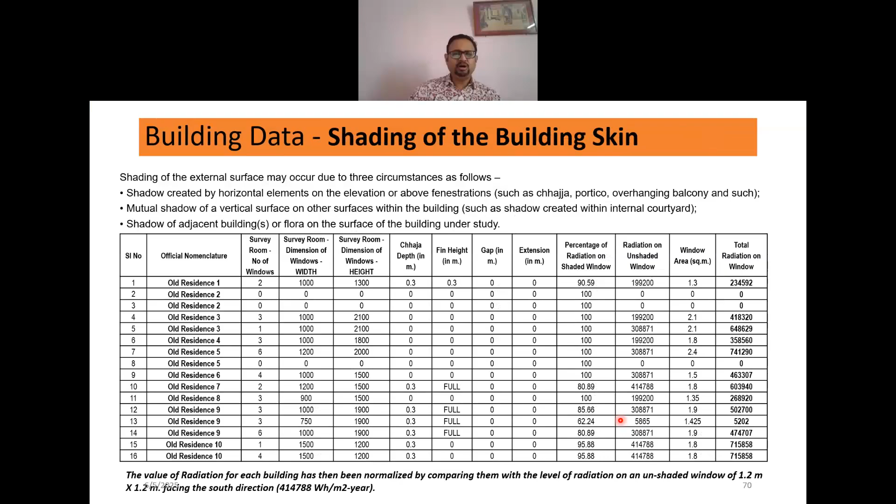Similarly, data on surface area to volume ratio were also computed for each of these buildings. Shading of the building skin and the ultimate total radiation on windows were calculated for old and new buildings. Then opening versus wall ratio was also calculated for old and new buildings.

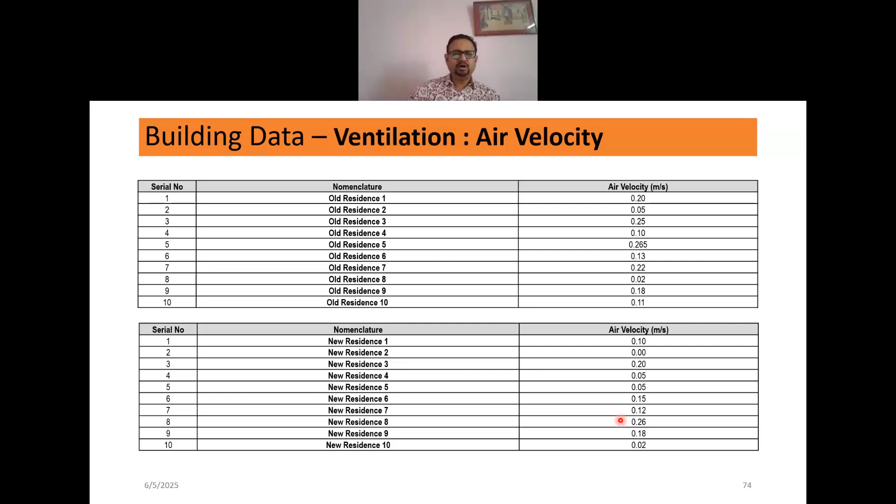And then ultimately, the air velocity and ventilation of the buildings were computed for both types of buildings. Again, we went into the heat index chart and tabulated the data in this manner.

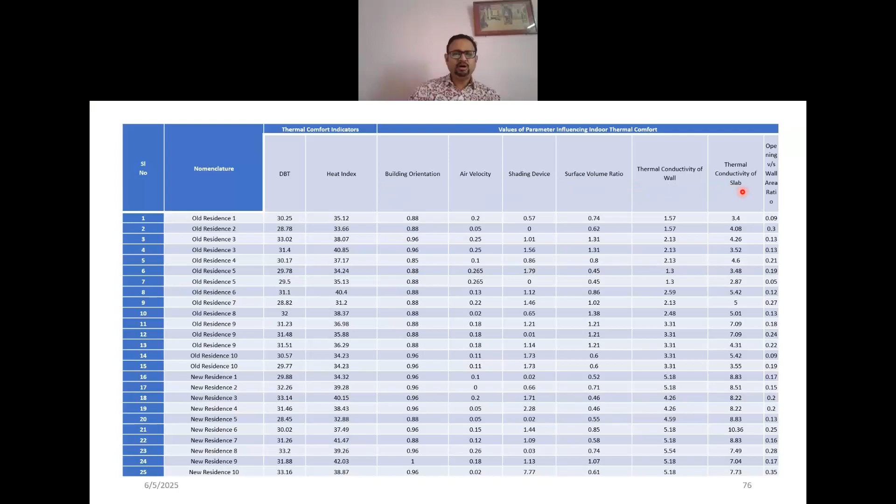So for old and new buildings, we have the DBT values, the heat index value, and the values of different parameters. These are the indicators, and on the right hand side are the parameters: orientation, air velocity, shading, surface volume ratio, thermal conductivity, and opening versus wall area ratio.

With this particular data, we computed and interpreted correlation coefficients between the indices and the building parameters using SPSS. First we did it for the old buildings, and then we found the different correlations.

We conducted the correlation with DBT as well as the heat index — that means the basic raw data as well as the composite index. For the composite index, we found that surface area versus volume ratio has a moderate influence, and opening versus wall area also has a moderate influence on the heat index of the building.

The more the surface area versus volume for these residences, the higher the thermal index. The fewer openings there are, the more it is negatively correlated.

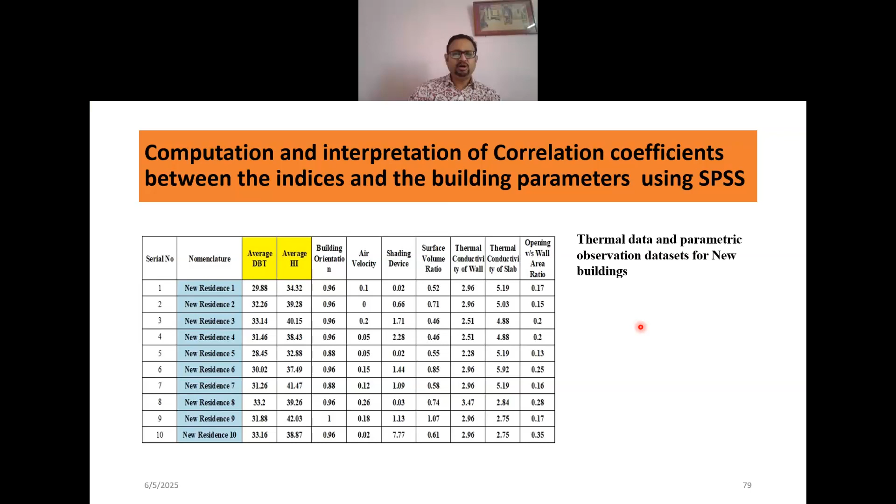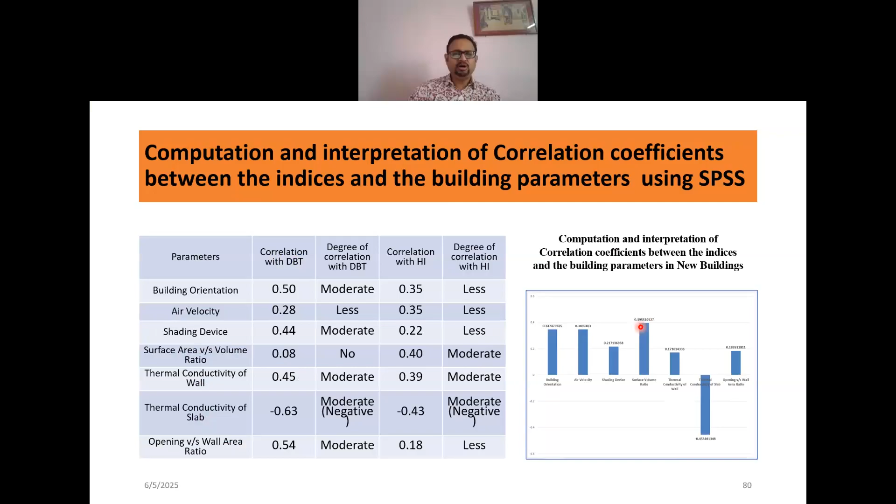Similarly, for new buildings, it was also done. But in this case, for new buildings, we haven't found any predominant layer, whereas thermal conductivity of the slab, the more the thermal conductivity, the lesser is the comfort inside. So that's what we have found, obviously. So objective 2 also has been thus fulfilled.

The coefficients show a higher degree of influence of surface area versus volume ratio and moderate influence of thermal conductivity of wall in old buildings. These are the predominant parameters which affected these buildings. On the other hand, the coefficients of new buildings do not show any high degree of influence on the thermal comfort indices. 4 out of 7 parameters, however, have moderate influence over the comfort indices in the new building.

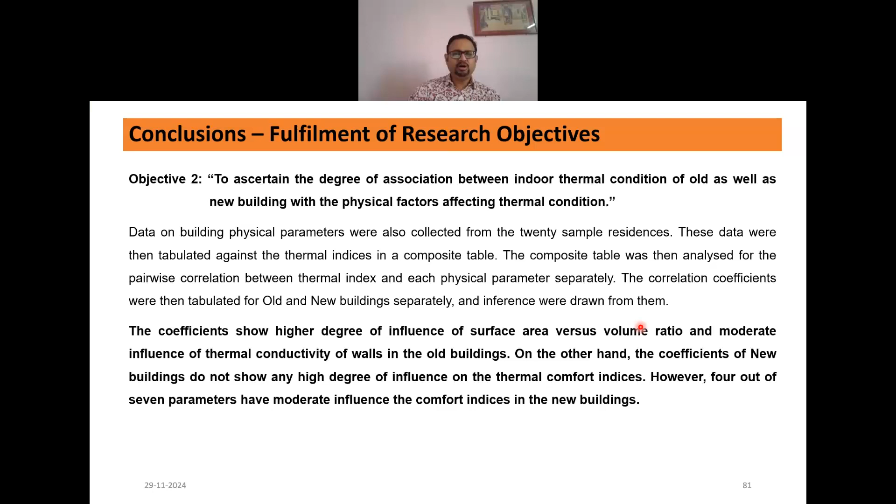So with that, let us conclude today's presentation. I hope that this case study of the research would help you in your learning. So with that, let me conclude my presentation and over to Professor Shubham Meena.